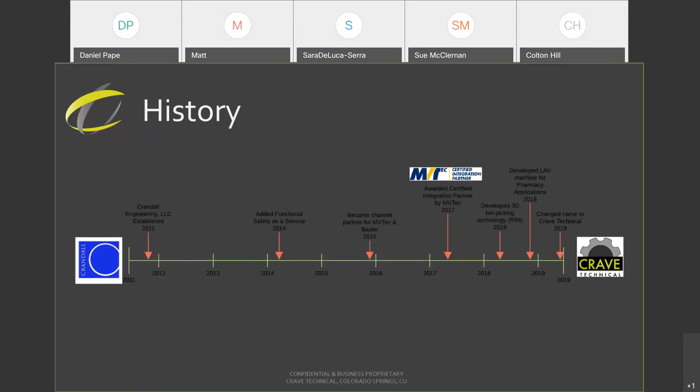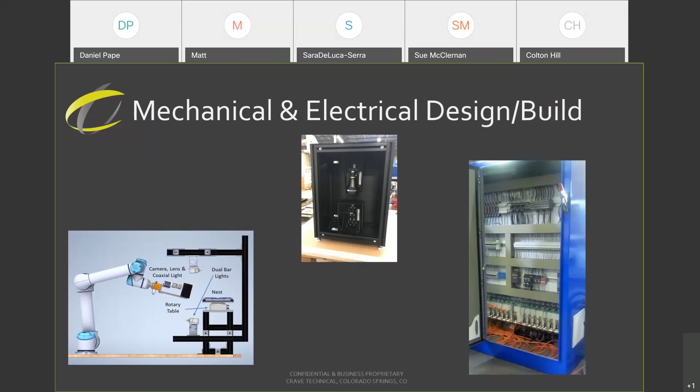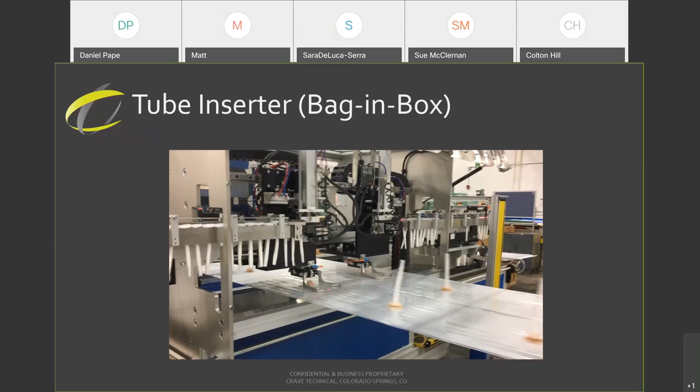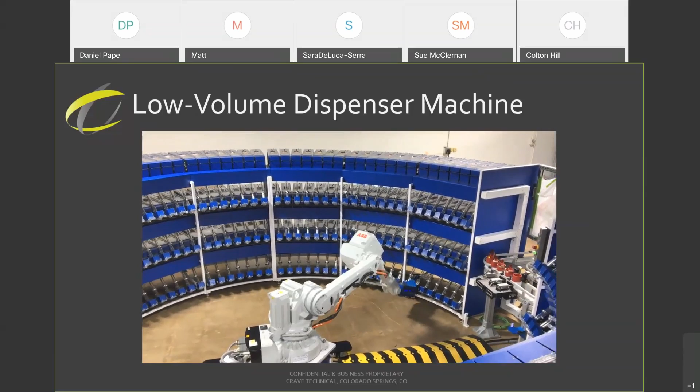So we helped a customer up in Longmont integrate their machine. This machine specifically is responsible for taking the bottles you see at the Infeed there. It picks up the bottles, takes them to a tube, and at that tube there are drugs sitting in there. It's our customer's responsibility, through their software, to count out the drugs into those tubes and prepare the location for us. We take that data, pass it to the robot, and complete the pick as you see there.

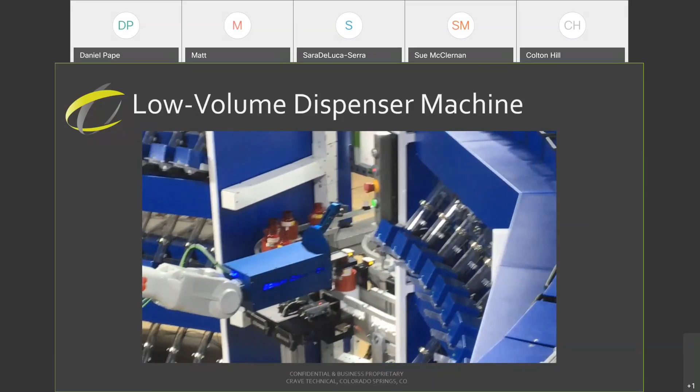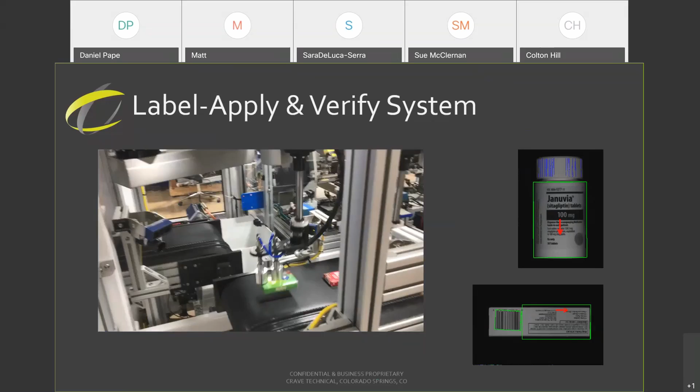We are getting that pick point, picking it up with one or two suction cups, bringing it over, inspecting the bottom, inspecting the sides with 4 other cameras you see there flashing. Then once we see those barcodes on the side, one of those sides, we pass that off and put it onto the process belt.

This next robot has a different on-the-arm tool specifically designed for labeling. This robot will pick up a label from one of the printers over there, and we're using vision to place this label on an adequate spot on these products.

As you can see in the lower right picture, the vision that we use is to avoid those barcodes. You can see the orientation in which we want to put the label, and then the place where it needs to be, away from that barcode in order to not cover it up. It's just an important aspect of this machine. As you can see, these products aren't really pharmaceutical.

These are the test products we were using. This is in the development phase for this machine.

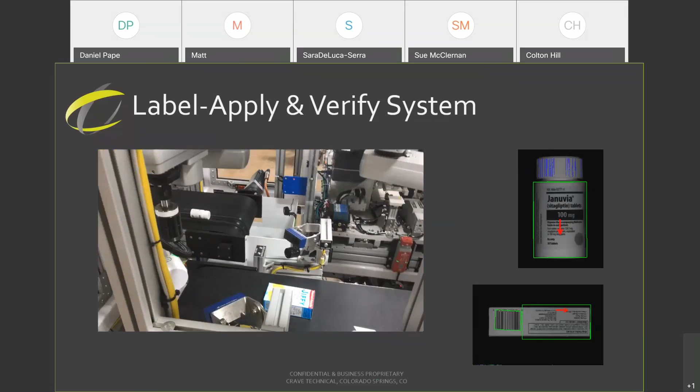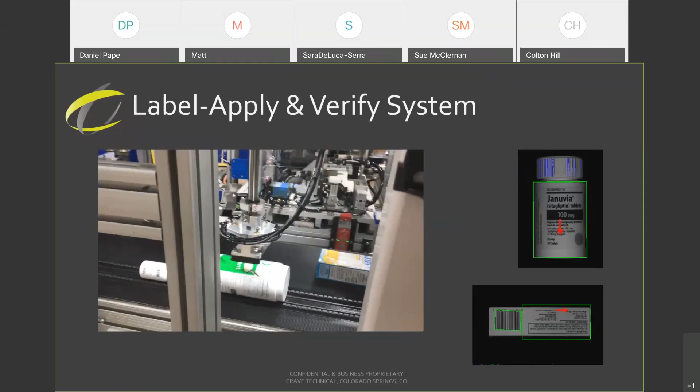This machine would be processing pharmaceutical drugs at the end of it, so it's very important for the data to get handshaked properly throughout this machine to make sure these labels get printed and applied on the right products. These labels will contain the customer's address to ship these drugs out to them. It's very important that the validation is accurate.

This last camera you can't see, but you might be able to see some flashing, is right here for the verification stage, and that's verifying those labels were placed on the correct position, on the right product, and then it goes into a tote below to get passed off either for accepted or rejected, depending on that verification camera.

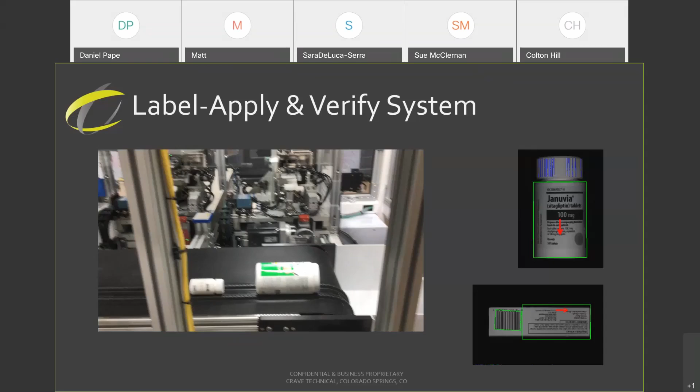Then this next machine here, this is the robotic infeed module. This is meant to be the downstream component to that LAV machine that we just saw. So once those items are labeled and put in a tote, they go throughout the pharmacy.

They might get other products and then go to a human first. It kind of depends on the process of each pharmacy. But then at some point, we've got to pack them to go to the customer. So you saw at the beginning of the video, it dumped those out into this plate.

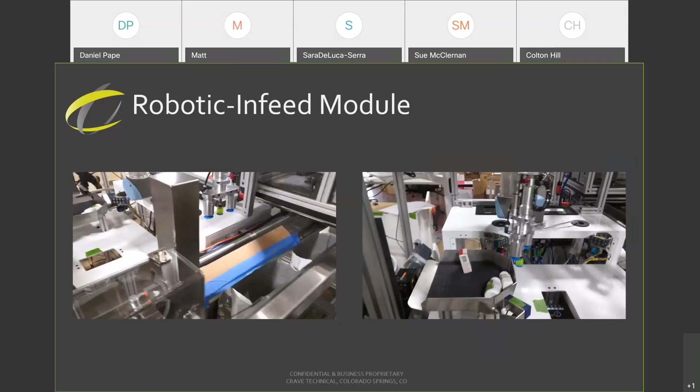Above that pan sits both a 2D and a 3D camera. We use the data from both of those cameras to pass a pick location to the robot. So when we dump the parts and get the field, we're looking at the field and deciding, okay, where does the robot need to go to pick the products most efficiently?

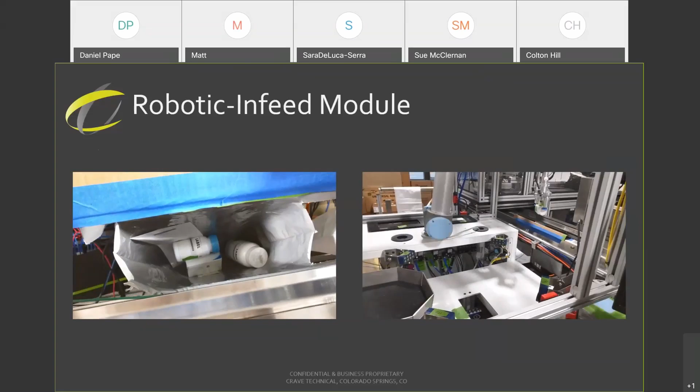And then after we pick them, you can see them be brought through another set of cameras similar to the LAV, and what we're looking for there is the label. So just as it was important to verify that we put the right label on, we're now verifying that we are holding the product we think we're holding, it belongs in this order, and then it goes in the bag.

So we're doing that verification yet again, because after things are in totes, sometimes stuff falls into them, stuff falls out of them. So those are all things we want to know that this machine can identify.

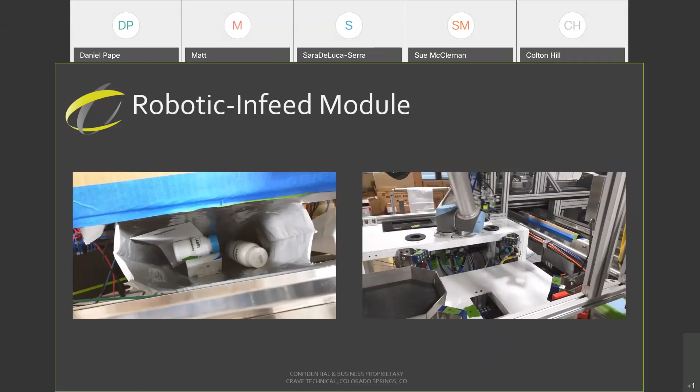Now, this last machine is called the EUV inspection machine, and we're actually using a FANUC robot for this one. So as you see, all three or four different machines we have, three that had robots, are all different manufacturers. For this machine, we are inspecting all sides of these two plates, known as a cover plate and a base plate.

So this machine is a really good example of how we have to come up and size the camera, size the lenses, figure out what kind of lighting techniques we need in order to meet the client's features, or to see the client's features that they want to see and/or defects for these plates.

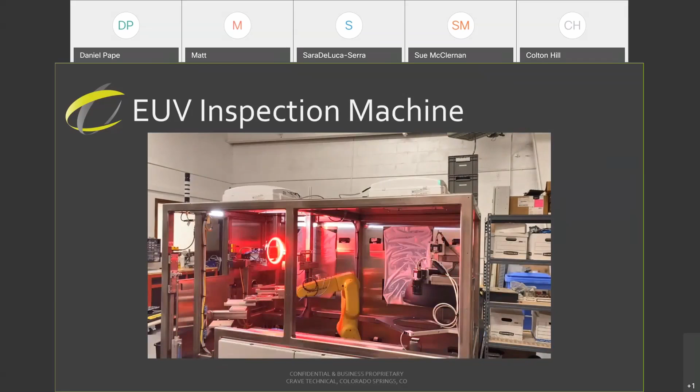You can see the panel right below it too. We actually designed all the electrical work needed for that panel as well, so absolutely everything has been done by Crave Technical. This is designed for a cleaner application, which is why you see those HEPA filters on top—they filter all the air out for this machine, because these plates have to be in that clean room setting. So, very clean, very precise inspection machine.

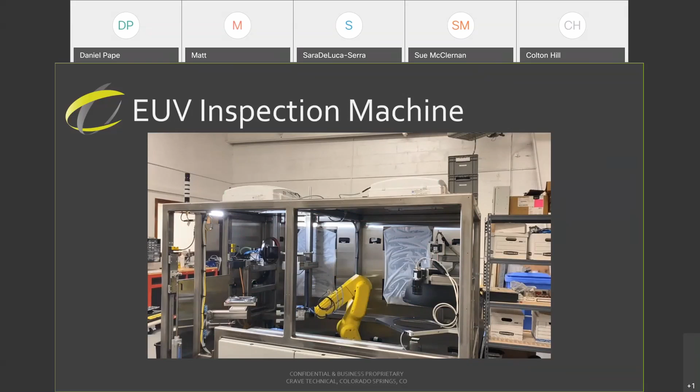So specifically right now, we're looking to recruit an automation intern. That entails working alongside Nolan and I, not only helping out with machines you may have already seen, but also developing your skills in machine vision, controls programming, and robotics programming. Our full intention with the position is to hire somebody on as an intern for a while, and then as you come up to speed and become proficient in these different areas, we would hire you full-time as an automation engineer, just as Nolan and myself are.

Some of our basic requirements: we're really looking for someone who's going to graduate this semester, because we want to push hard on having you on full-time without having to deal with school anymore, which is pretty nice. We're looking for degrees in engineering, physics, or computer science, and at the most basic level, some familiarity with object-oriented programming and familiarity with electrical properties and circuit design.

These full requirements and a more detailed description can also be found on a Handshake listing for the same position. If you ever want more detail, you can go to our website for more videos, or that Handshake listing will give you a full listing of these requirements.